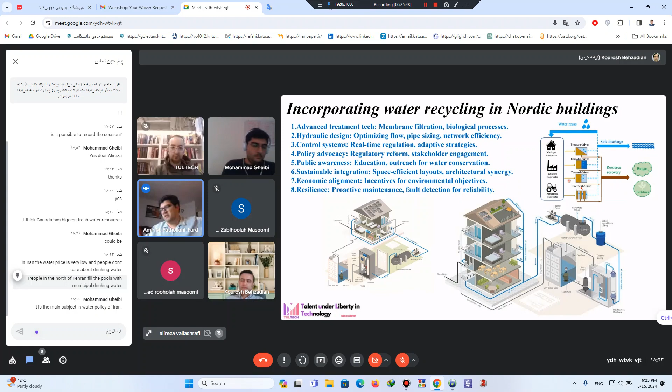I think we can look at Saudi Arabia or some developing countries in the Middle East that created new technologies for water recycling, and how they want to create artificial lakes, artificial rivers, artificial lands that change the weather and climate for the regions. It's very nice. I totally agree. Okay, let me just carry on and finish my presentation.

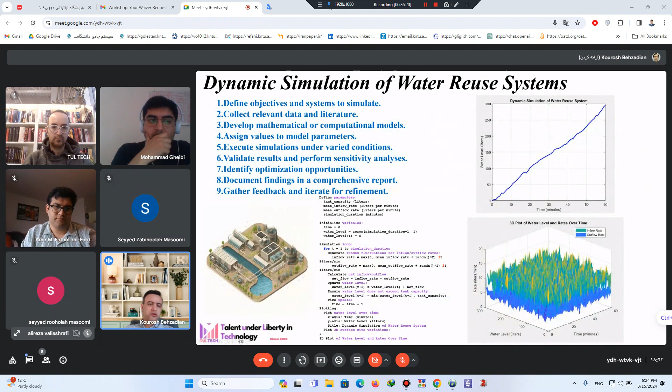I wanted to highlight the importance of water recycling. We have a dynamic simulation of water reuse systems, with some steps we need to follow, using MATLAB for example. So I'm going to try to pass quickly.

We can also optimize water recycling strategies. There are some steps we have to follow: vectorization, pre-allocation, model refining, dynamic adjustment, and parallelization using GPU to speed up the optimization process. Dr. Amir is the expert in these optimization techniques.

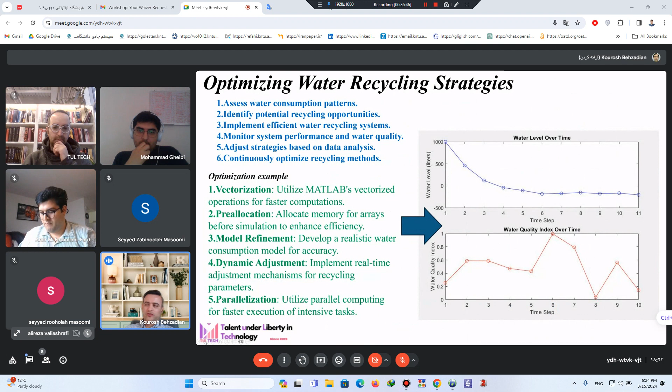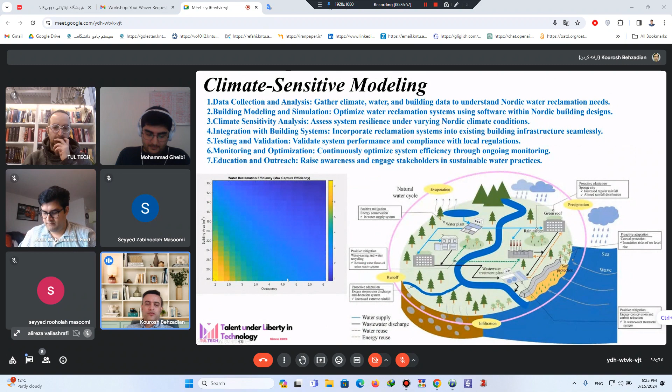Another area is climate sensitive modeling, where we can include the sensitivity of climate variabilities to do sensitivity analysis and analyze the system under uncertainty.

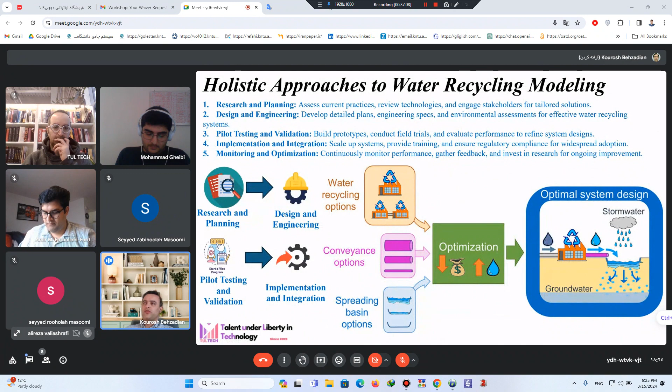Another point is the holistic approach for water recycling. We have to look at the comprehensive approach and include all the components and elements together. That's the nice figures that we have.

For predictive modeling, we can use either deterministic or probabilistic models to look at water demand predictions. So that's another aspect.

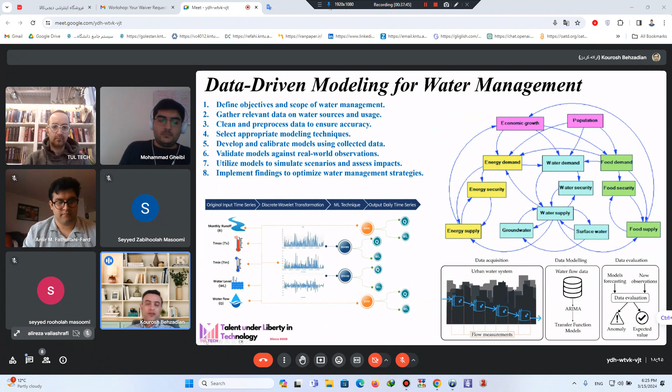Also data-driven models - if you have sensor-based data, we can collect data using a typical SCADA system and develop data-driven, AI-based models for predicting the system and analyzing and operating in real-time performance.

Another aspect is life cycle assessment, or LCA. This is very typical - we have to include any kind of emissions, like H2S or CH4, specifically from wastewater treatment, and analyze them through the life cycle assessment, considering everything from construction, operation, and demolition together.

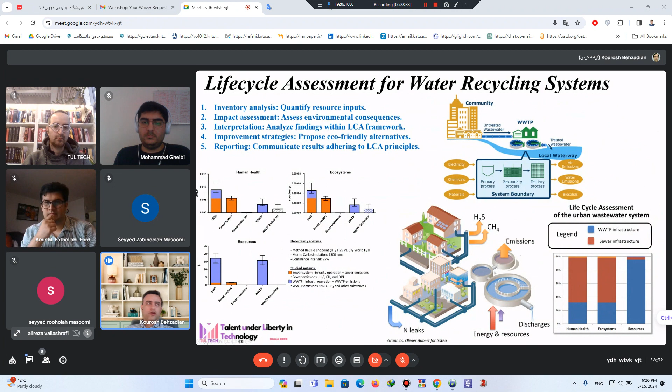In this way, we can consider different components of the system and see which one leads more to carbon footprint, energy footprint, or water footprint, and then make a decision on different options, which one is better.

Finally, we can also look at integrating IoT and AI. Nowadays it might be good to seriously look at how we can integrate things with Python-based programming, ChatGPT, or GitHub Copilot, which is also connected to develop some sort of AI-based and IoT systems.

Specifically nowadays, we have lots of sensors collecting real-time online data, or we can easily set up and install some sort of AI-based system. I think this is the most important area that we should focus on.

If we want to focus on any real project between countries like Europe, UK, and North America, we have to invest a lot in research articles and everything. We have to focus on IoT, how we can set up IoT technologies. I think this is an area where we are really lacking.

Normally, the approach we found is that we have to use off-the-shelf technologies. We are not at the stage to develop sensors ourselves, so we have to see what sensors are available in the market - humidity, water level, whatever sensors that are off the shelf and quite cheap - and try to connect them in some sort of compartment or package box we can design to assemble such an IoT system.

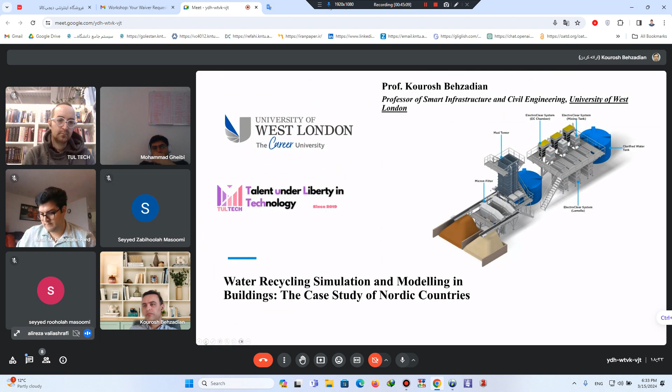Yes, go ahead, Alireza. Yes. I don't think so. I don't think that. Yeah, yeah,

Are you familiar with LC mass, Alireza?

I think that's the only way, as far as I know, for detecting these kinds of particle contaminations. But the point was that...

When we have the contaminations, let's say a source of contamination from industrial sources, I think the main concern we're just going to focus on is residential. In the UK, and more or less in Canada as well, Amir knows better, we might have a combined sewer. In the UK, combined sewers are very popular. A combined sewer is where sanitary sewage and surface runoff are collected in the same pipe.

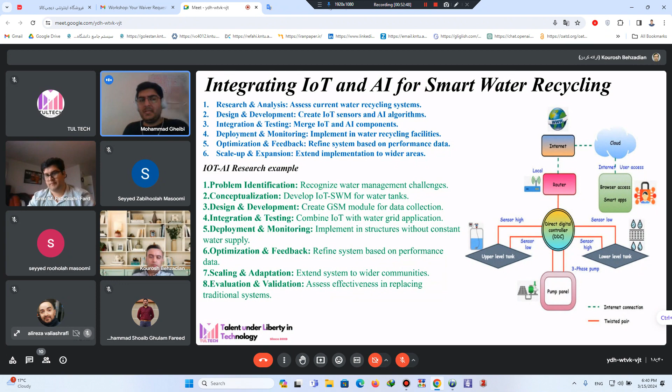Yeah, I truly agree with you. Real-time optimization is a very novel concept that can be used for optimizing and analyzing water supply and wastewater collection systems. I think this is an area of research that can be explored more with advanced use of machine learning and optimization algorithms that can help us heuristically optimize the data in time for analyzing solutions based on the conditions and complexities we encounter in our water supply and wastewater collection systems, right?

Yes, specifically for real-time error detection, we need predictive models like AI-based ones, which are quite fast. If you want to do optimization, it has to be done quickly too, in a short time. But the predictive model is really important to do it quick and efficient, with a good level of accuracy, because prediction with low accuracy is absolutely nothing. So we have to have a good estimate, otherwise no one can rely on and trust that data.

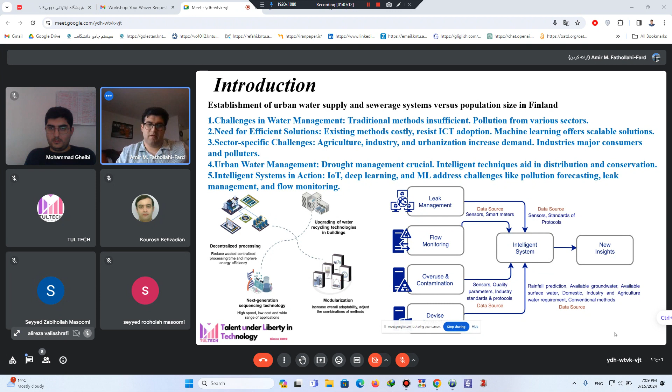Using AI, we want to address the challenges and provide insights for water management and water network solutions. To manage the systems, we need to consider the water supply and wastewater collection.

It is important how we supply the water from the surface and how we collect it, to recycle, to improve, to develop, and to use energy using the wastewater collection.

Developing such networks for integrating water supply and wastewater collection has different complexities, difficulties, and risks that we need to consider: many sustainability issues, ecological patterns, and considering a full solution for flexibility, resiliency, and sustainability for water supply and wastewater management.

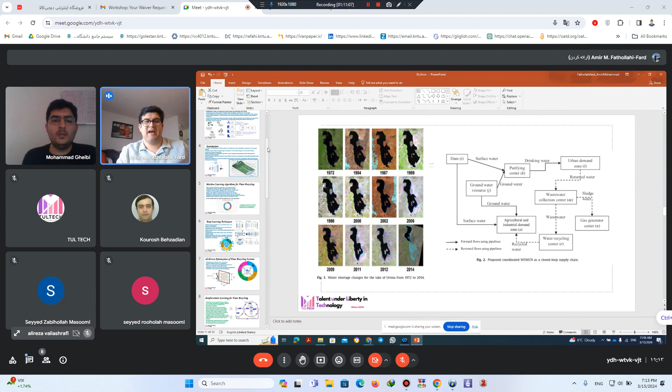Sure. In the following, I have a plan to define the water supply chain as a closed loop supply chain, how we can provide a network to integrate these issues. We'll talk about the closed loop supply chain, and then after that we have an optimization problem where we can focus on how we can use metaheuristic or heuristic algorithms for optimizing.

Such methods can be customized to any optimization problem, but for this type of problem, such as water networks, from the baseline of network design, water networks have more constraints than typical network design, because we need to consider logistical issues and also the pipeline. I will talk about them in more detail.

But I want to highlight that machine learning is nowadays very popular for analyzing water recycling. We need to define the flowchart of steps that we want to use for water recycling, for analyzing the parameters, how we want to predict the demand, and how we want to train our historical data.

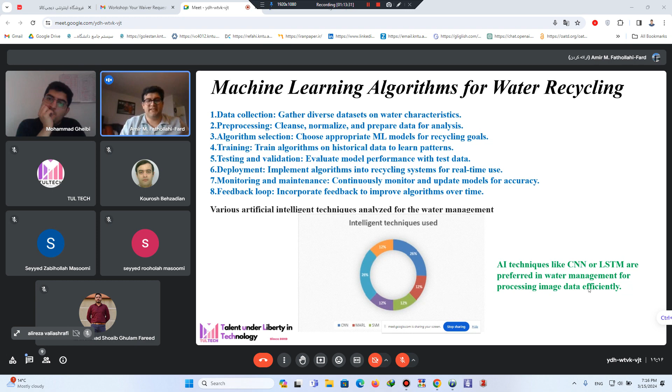Therefore, having many options for machine learning, we can consider different neural networks or the long short-term memory algorithm methods that can be used to improve the accuracy for water prediction demands and improve analyzing water management systems. So, machine learning is one idea. Another one would be contributing to the deep learning method.

Generally in deep learning, we should consider many layers to improve and train our data. When we increase the layers, for example using the multilayer perceptron, at each iteration of our algorithm we can improve the accuracy to detect errors or detect data that can be important for monitoring water systems, for analyzing details for a multi-factor, multi-agent, multi-level water supply and wastewater collection system. Similar to machine learning, in deep learning we also need to consider different layers for analyzing and managing our water supply and wastewater collection systems.

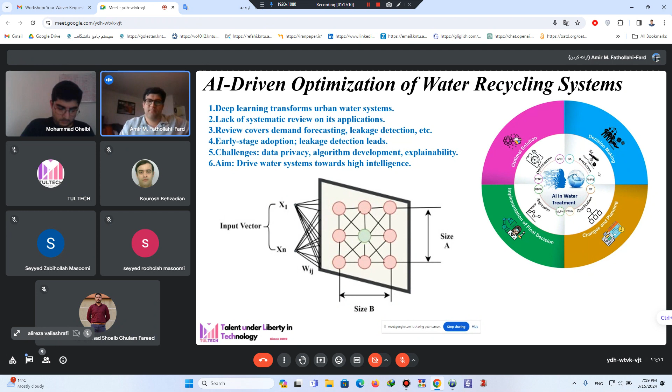As you can see, for the action of how we can get an optimal solution, we need to analyze the problems and provide a cycle of how we can integrate the trained data as input parameters, and then apply an optimization algorithm like genetic algorithm to find a solution for our water network, to design the pattern for our water network.

Similarly, another popular technique that is very important and commonly used in our research articles is reinforcement learning. This is a very advanced machine learning method that can help us learn the optimal actions and reduce the errors in our system.

Another important suggestion for interested readers is that we can use reinforcement learning to improve and design the optimal actions for our water recycling system. For example, as you can see, this is from one of the papers showing how we provide a loop and a connection between the variables, and based on reinforcement learning, connect and consider the details for our water recycling system.

Using reinforcement learning algorithms, we can drive real-time decision-making for water supply and wastewater collection. Based on the real-time data, we can use reinforcement learning for optimizing and making optimal decisions for the water supply and wastewater collection network.

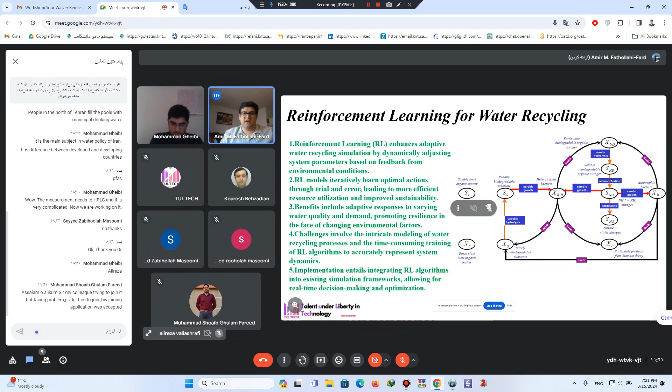Generally, a decision support system integrates all the machine learning and all the details from operations research in an integrated manner, to define a full solution for analyzing the water supply and wastewater treatment plants, with solutions considered using multi-criteria decision-making methods.

For example, there are many multi-criteria methods like TOPSIS, like DEMATEL, or many other decision-making methods that can help us sort the criteria, analyze their weights, and consider different sustainability issues, ecological factors, or other scientific items that can be integrated into our decision support system.

Therefore, these are the methods that can be used for water recycling and water analyzing systems. In the final steps, I want to provide a research article on how we can model the water...

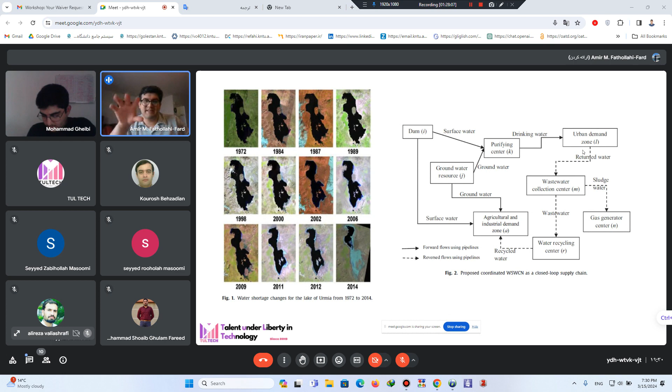For example, we consider that there is no connection between the same facility. It means there is no network between the purifying centers in our network, or we need to consider that there is no link between wastewater collection centers, and each wastewater collection center would act separately in our water supply network.

Another assumption relates to parameters that are uncertain. In this regard, to estimate the parameters, we must use machine learning or other learning methods for prediction, to define the demands for the agricultural and industrial sections and for our home users, considering scenario-based analysis. In this paper we consider probabilistic scenarios for estimating and improving the accuracy of our input parameters used in the optimization problem.

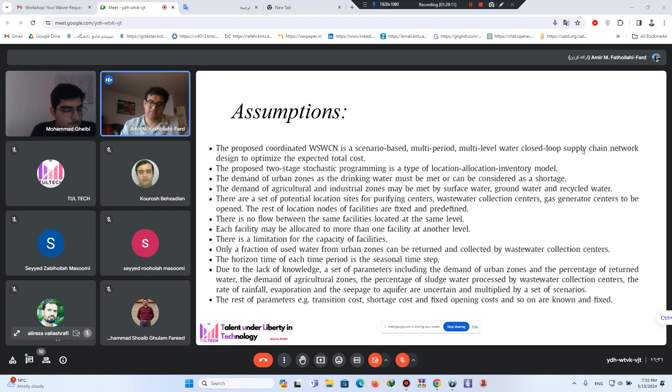Dr. Amir, was that one objective function in your model? This is a single objective. Yes, it's a simplified single objective that only focuses on economic issues, and the rest of the other issues are considered as constraints. Therefore, this single objective computes the costs for all facilities and for transitions based on the network we define for the water supply and wastewater collection.

Based on this issue, we need to consider the inventory constraints that we have, including evaporation on the surface water. There are many factors that can impact the inventory status of water at each facility, based on climate issues, evaporation, and rain predictions, such as how many rainy days we have and how much water can be added to our systems at each period.

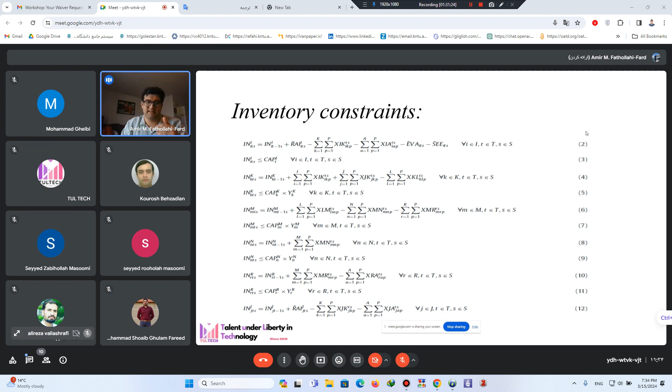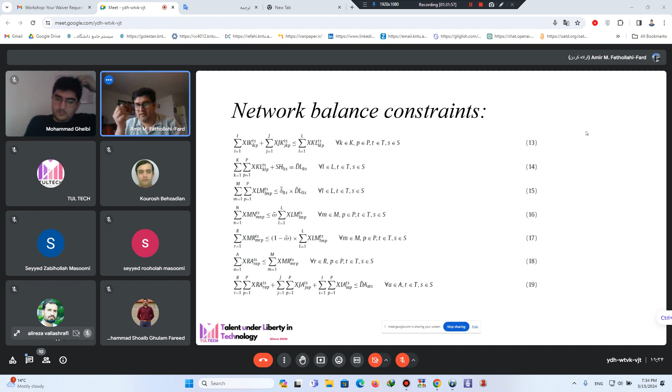Here we have the inventory constraints, and as a network with multiple facilities, we need to connect them. We need a network balance constraint that shows there is a balance between the inputs and outputs at each node in this facility. These are the network balance constraints that must exist in any water supply and wastewater collection network.

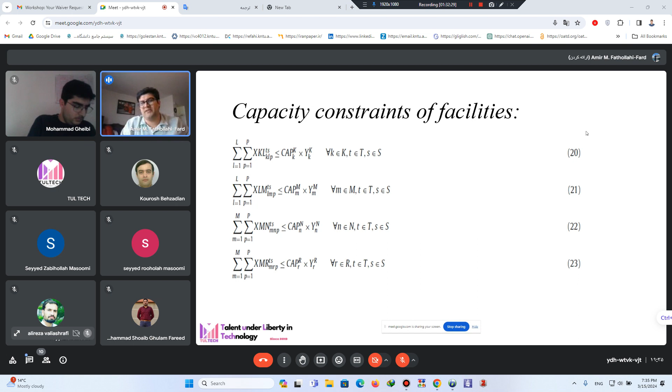We will have capacity constraints that show at each facility there is a limitation for the water capacity that can be operated—at each water treatment center, at the purifying center, at the wastewater collection center. There is a limitation for the water operated at each facility.

In a water supply and wastewater collection network, we need to define different pipelines and canals that can be used to connect the facilities to each other. These pipelines also have capacity limitations. We need to consider the capacity that is suitable for the connections for the pipelines in our network.

We also have location constraints, meaning we cannot locate the purifying center in any location we want, based on the limited potential locations previously identified from historical data. We need to select one of them, or a few of them, based on the limited budget we have for our network to make the location decisions for our centers.

And finally, decision variables, which can be binary and non-binary variables in our optimization model.

As an optimization model, we considered a case study based on the West Azerbaijan province in Iran, and the source of the dams that exist there. Based on the data we predicted, we solved our model and considered the cost function based on realistic, optimistic, and pessimistic scenarios.

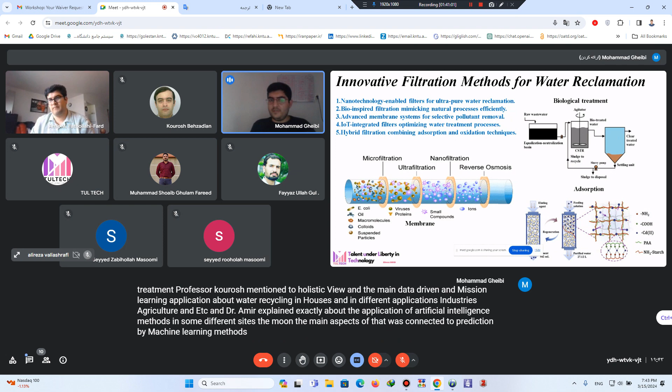And Dr. Amir explained exactly about the application of artificial intelligence methods in some different sites. The main aspects were connected to prediction by machine learning methods, different machine learning with focus on deep learning, and another one was optimization in the loops and supply chains by meta-heuristic algorithm, which I know is his main expertise.

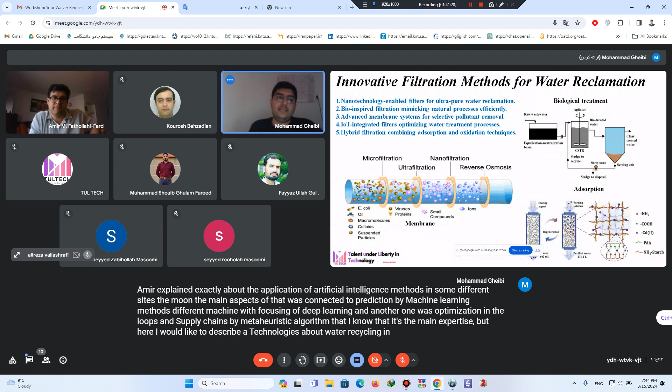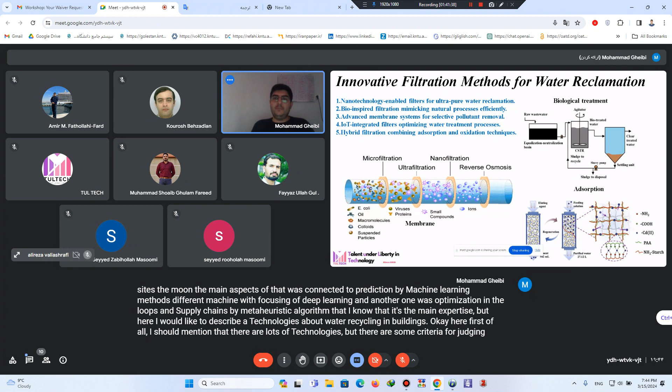But here I would like to describe some technologies about water recycling in buildings. First of all, I should mention that there are lots of technologies, but there are some criteria for judging them. As an environmental engineer, when we want to select one of them, we should consider criteria such as investment costs, material costs, and chemical costs during the operation.

The civil engineers and designers mentioned that 60% of the share in decision making about technologies is related to operation duration, because during the operation process we should spend lots of money continuously, and based on this fact we should consider the current cost.

Maybe, for example, I'll mention this - in this picture you can see there are some different methods. One popular method is the application of membranes. There are different types of membranes based on the pore size - for example, microfiltration, ultrafiltration, nanofiltration, and reverse osmosis, known as RO - because each of them has a specific application.

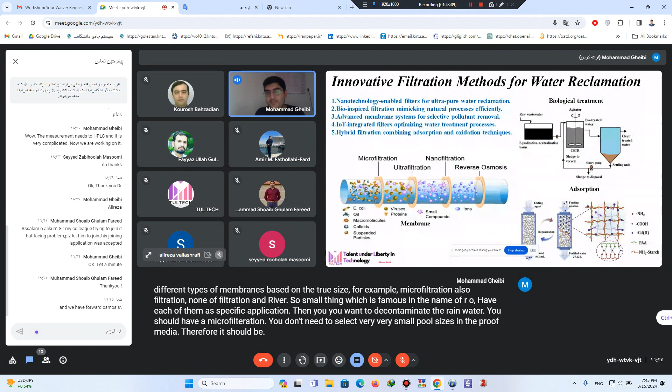When you want to decontaminate rainwater, you should use microfiltration - you don't need to select very small pore sizes in the porous media. Therefore it should be cheaper than other technologies, which you can see here in this picture, the left one. Based on the specific application, we should find the appropriate condition for this membrane technology.

In membrane technologies, the main problem is related to fouling, because after decontaminating by trapping the pollutants in the pore sizes, we will have fouling in the media. We should have backwash, and in the backwash process, on the reverse side of the membrane, we will release chemicals into nature. This is a disadvantage of the method, but its performance is much higher than other methods, and operation is very easy - but in simple terms, it is not a very green method for decontamination.

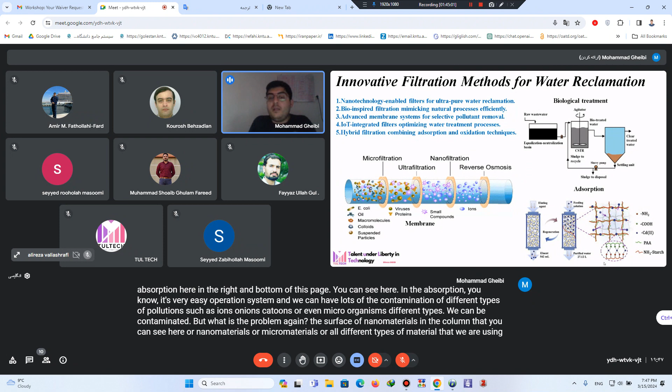Another one is adsorption. Here in the right bottom of this page, you can see that adsorption has a very easy operation system. We can achieve lots of decontamination of different types of pollutants, such as ions, anions, cations, or even microorganisms - different types, we can decontaminate them. But what's the problem? The surface of the nanomaterials in the column, or micromaterials, or all the different types of materials we use in the columns, become saturated after some time.

But it is another technology we can use. The best one from the environmental aspect, the most green technology, is biological treatment, because microorganisms, like in nature, help us decompose the structure of pollutants and create simple compounds in the effluent. But what is the problem? It is the microorganism.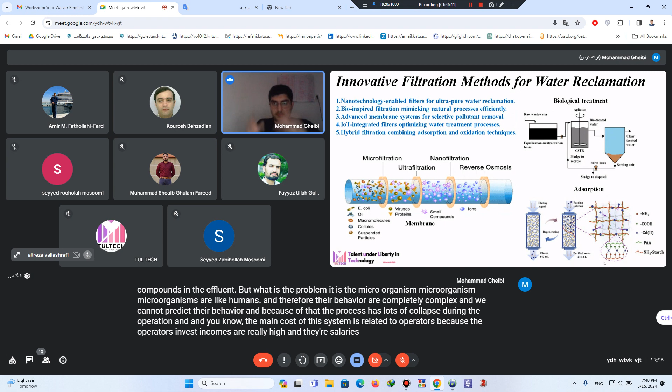Microorganisms are like humans, and therefore their behavior is completely complex, and we cannot predict it. Because of that, the process has lots of collapse during the operation. And the main cost of this system is related to operators, because their salaries are very high, since they should be very expert people.

But I said all of this because I wanted to say that in each method we have some advantages and disadvantages. Why am I telling you these notes about these technologies? Because with the application of simulation, we can reduce the cost of operation and design, both of them.

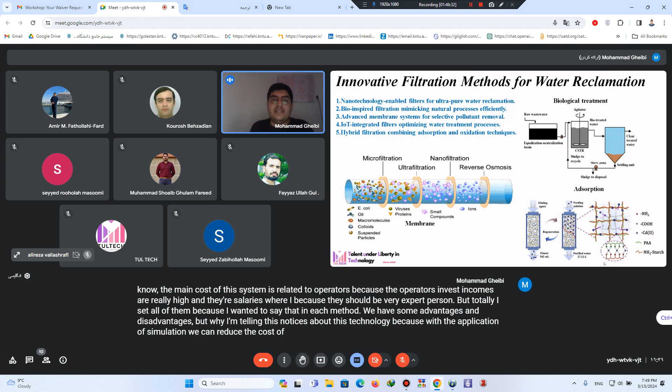In the following, very fast, I'm going to go through some applications and examples about these methods. One approach you should check after our meeting is in Scopus and Web of Science data centers, where you can find lots of papers about membrane applications. I think every minute some papers are published in the field of membrane application for environmental pollution - air, soil, water, and so on.

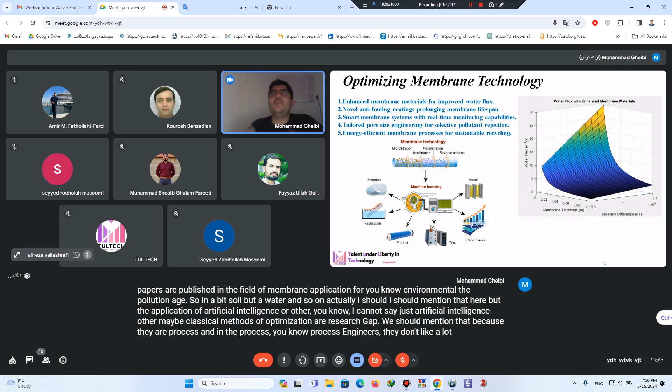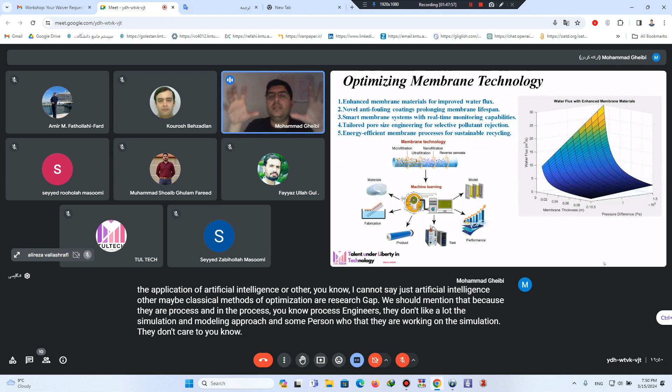I should mention that the application of artificial intelligence, or other classical methods of optimization, is a research gap. This is because process engineers don't like the simulation and modeling approach much, and people working on simulation don't care much about the aspects of experiments.

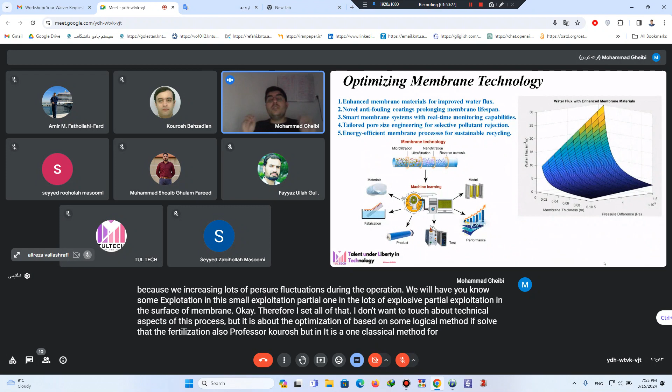Okay, therefore I said all of that. I don't want to talk about the technical aspects of this process, but about optimization based on some logical method, FSolve. Dr. Fathollahi-Fard is an expert in this, also Professor Kourosh, but it is one classical method for optimizing multi-objective functions in the same process.

Another aspect I want to talk about is the biological process. As I mentioned before, biological process complexity is connected to the behavior of microorganisms. Because of this fact, we should consider different criteria when we want to optimize this system.

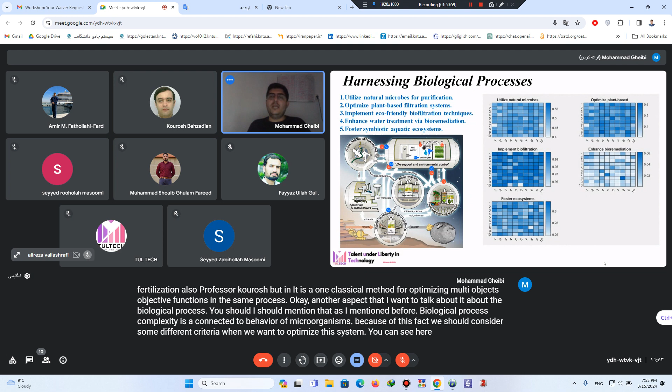You can see here we use some heat maps. Why heat maps? Because with the application of heat maps, we can compare different cells which are linked to various aspects of the process. If you have a specific microorganism for decontamination of chemical oxygen demand, as an index of organic material in wastewater...

When your pH is decreasing, they are not working. When it is increasing, they are not working. When temperature is increasing and decreasing, they are not working. They are very, very sensitive phenomena and live ecosystems in the environment.

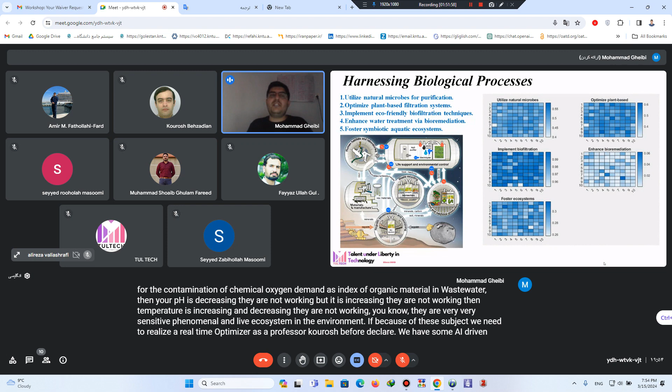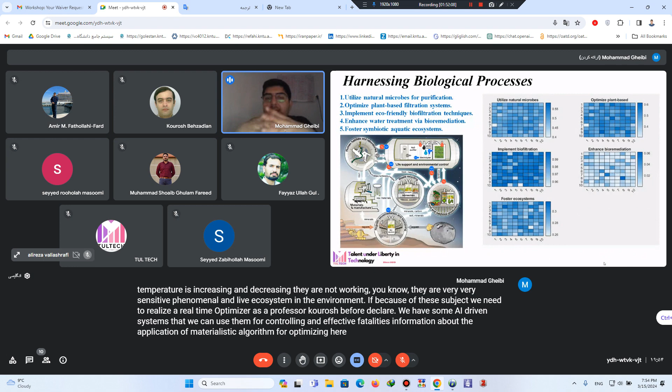Because of this subject, we need a real-time optimizer. As Professor Kourosh declared before, we have some AI-driven systems that we can use for controlling. And Dr. Fathollahi-Fard mentioned the application of meta-heuristic algorithms for optimizing. Here, we need to optimize and implement a data-driven, real-time system because we have lots of sensors in the reactors.

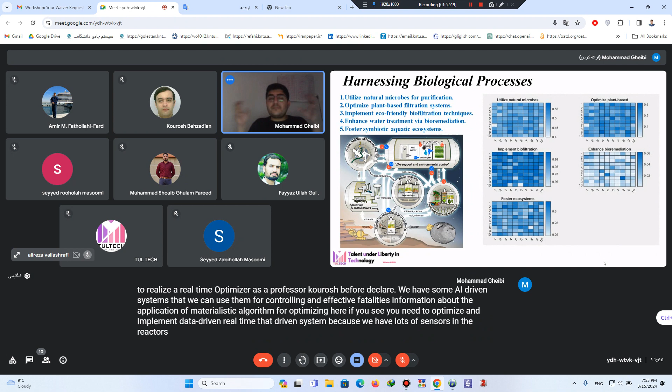For example, in activated sludge reactor or more complex systems such as SBR, sequencing batch reactor, or other reactors, we have lots of sensors for detecting pH, alkalinity, temperature, and other parameters. We should make decisions real time as operator in each reactor for finding the possible problem.

Here in the left and above, you can see one optimization about some features. The feature here was connected to the performance of the system about decreasing chemical oxygen demand and biological oxygen demand in the reactor. But biological oxygen demand, we cannot compare or compute it real time, and sensing it real time based on one ratio by chemical oxygen demand we are detecting.

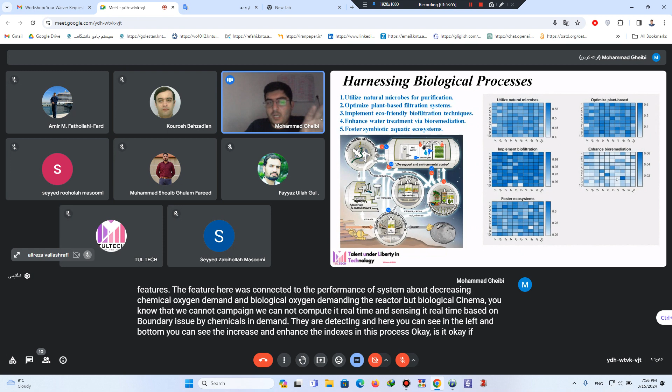And here you can see in the left and bottom, we increase and enhance some indexes in this process. Okay, is it okay if you have any question? Just ask me about these two slides.

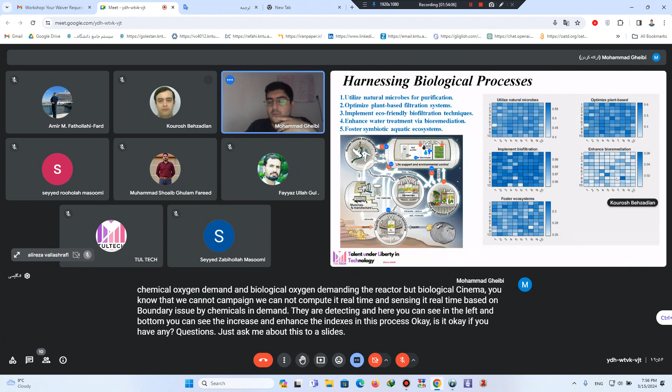Okay. About the next step, I should mention some applications about combination of different methods. What is the main problem in this situation of wastewater treatment plants and water treatment plants?

You can imagine that in the water treatment plant or wastewater treatment plant, we cannot purify the water resources just with one system. At least we need 6, 7, 8 or more systems because we have primary treatment, secondary treatment, and advanced treatment.

Each treatment system has influence on the other ones. And because of this issue that I mentioned, we should connect all of them as one complete and comprehensive system also for this problem. Why am I telling this fact?

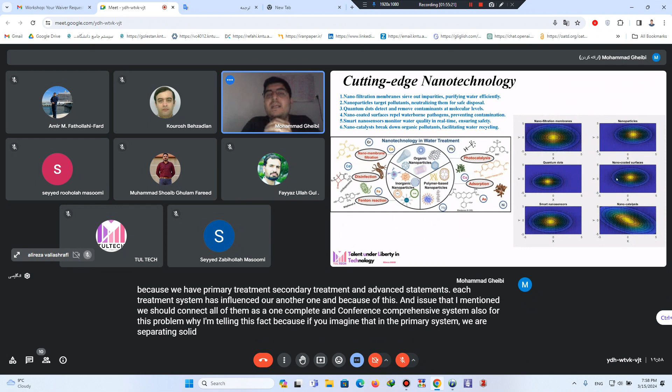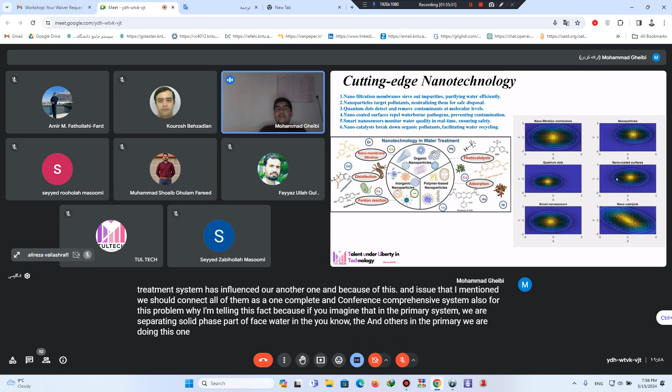Because if you imagine that in the primary system, we are separating the solid phase part of wastewater, and others in the primary, we are doing this. In the secondary process, we are decontaminating the organic matter, just organic materials.

And in the last one, as advanced, for example, one advanced method, we are decontaminating the microorganisms. But solid phase, and also organic one, and also just organic from solid and dissolved one, and also microorganism - all of them have different behavior, and connecting all of them in one dashboard needs a high potential computation system.

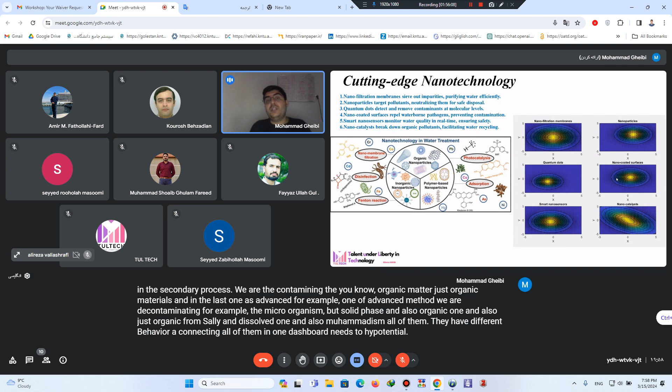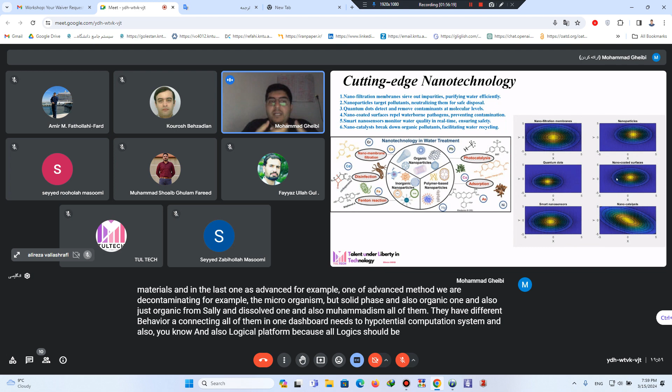And also a logical platform, because all logics should be considered in different ways for meeting the contamination criteria. If you have any comments or questions during my presentation, just come and say something. If you want, we can negotiate together about these subjects.

Another application that both previous presenters mentioned is about connection of IoT and AI system. Why are we talking about the connection of both? Because with the IoT system, we can create the infrastructure for receiving, transferring, and initial processing. And with the application of artificial intelligence, we can execute appropriate logics in this parameter.

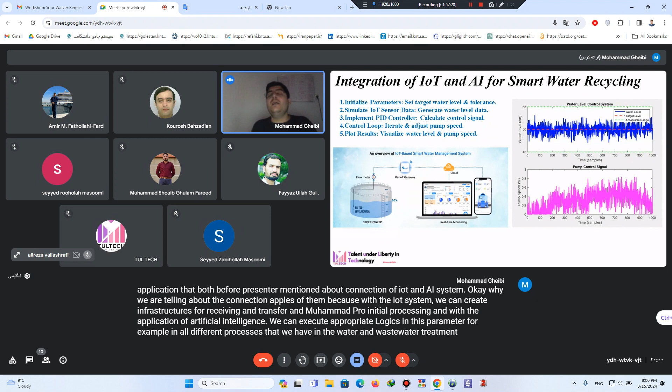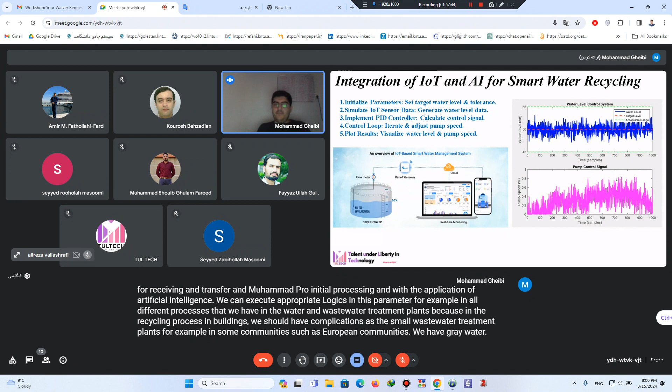For example, in all different processes that we have in water and wastewater treatment plants, in the recycling process in buildings, we should have packages as small wastewater treatment plants. For example, in some communities, such as European communities, we have gray water separately. We are gathering them in comparison to brown water. We are saying green water, gray water, and brown water.

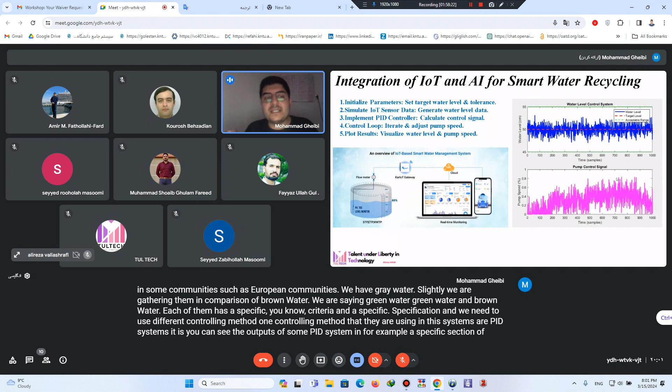Each of them has a specific criteria and specification, and we need to use different controlling methods. One controlling method they are using in these systems is PID systems. You can see the outputs of some PID system in, for example, a specific section of this infrastructure - for example, pump control system, because we should have some alarm management during this process.

Together with each of you, I will share these outcomes also with you guys, and we can have some email connection together. Each person is motivated by a specific target for ISI publication. We can negotiate together, and we can complete these research items because they meet at least the standards of ISI and TUL Tech.

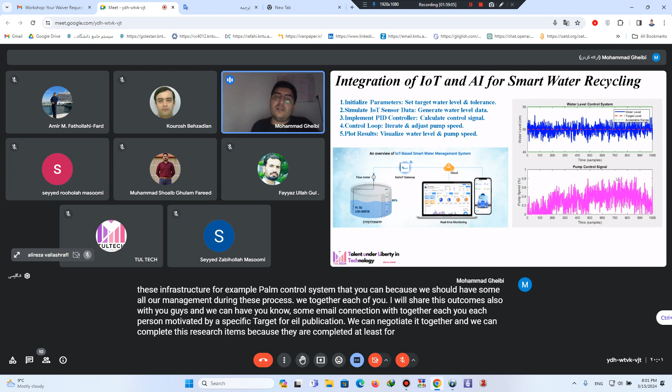Another issue I want to talk about is related to a popular subject about electrochemical techniques application for wastewater purification and controlling the system. But here the main topic - some people are working in their research on water quantity management, yes, water resource management. And when we are talking about the quality of water, the complexity of each aspect of water management will increase dramatically, because it's very important based on the type of contamination.

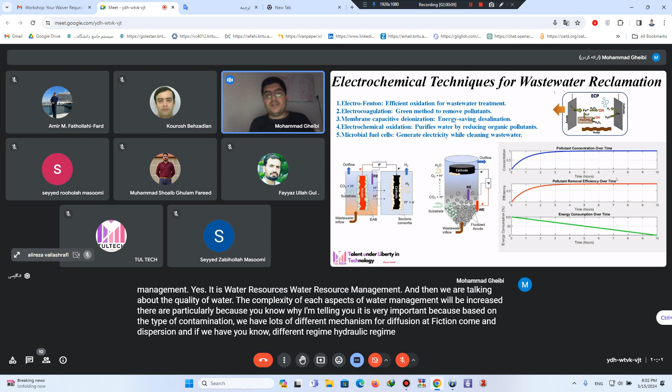We have lots of different mechanisms for diffusion, advection, dispersion, and if we have different hydraulic regimes in the water, we will have different behavior. What is the connection between fate and transport of pollutants in different hydraulic regimes? Based on this, in electrochemical systems we have all the parameters mentioned before. We have two electrodes in the system, a cathodic one and an anodic one, and we have one electric field between them, so complexity increases in this system. By applying machine learning and meta-heuristic algorithms, we can increase the quality of control in this system.

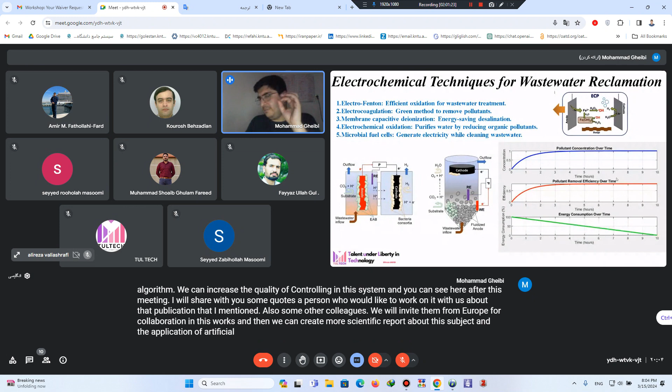After this meeting, I will share with you some codes, for anyone who would like to work on it with us, related to the publication I mentioned. We will also invite some colleagues from Europe for collaboration on this work, and then we can create a scientific report about this subject and the application of artificial intelligence and simulation approaches for controlling the performance of this system.

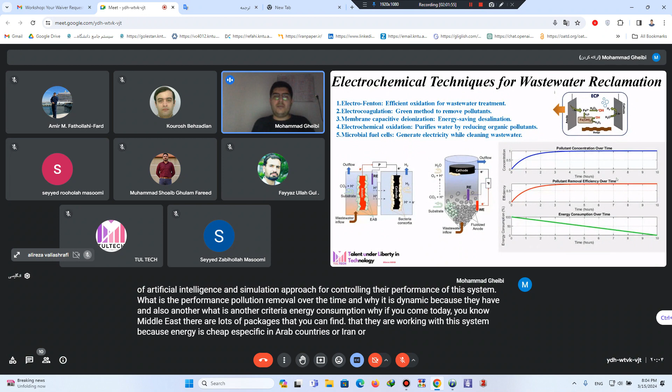What is the performance? Pollution removal over time, and it is dynamic. Another criteria is energy consumption. If you come to the Middle East, there are lots of packages using this system because energy is cheap there, specifically in Arab countries, Iran, or Saudi Arabia. But if you come to Europe, Canada, USA, or other Western countries, you find electrochemical systems for different applications integrated with renewable energy, just renewable energy.

Without renewable energy, you cannot find them because it's not beneficial for installers. Another aspect I wanted to mention is the multi-objective nature of both energy consumption and removal of pollution—it is another multifunctional parameter. Thank you for your consideration. If you have any questions, I'm here to answer them.

Excuse me, sir. Okay. Sir, would you please go to the previous slide? This last one? Yes. Okay, you have shown some graphs on the right side.

So what does it mean by the concentration? Is it increasing with respect to time? Yeah, so the pollutant concentration over time increases. Can you please explain it? Here, the concentration is the concentration of byproducts, not the initial concentration. Initial concentration is decreasing, yes.

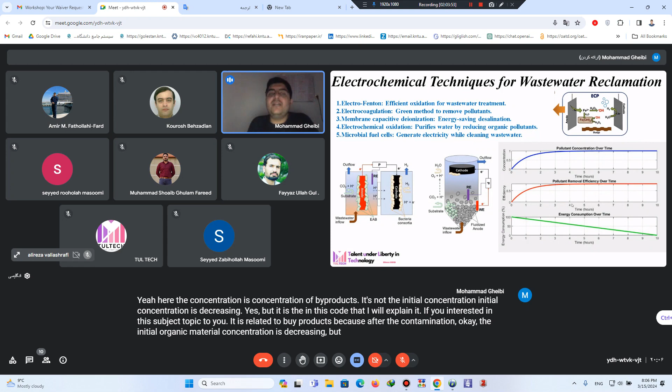It is related to byproducts because after the decontamination, the initial organic material concentration is decreasing, but what is increasing? The byproducts. Why are we simulating the byproduct concentration?

Because of the toxicity. After contamination, for example with different groups of PFAS, like PFOA or GenX, the most important issue after contamination is connected to the toxicity of byproducts. PFAS is a toxic material and is carcinogenic, but there are some shorter chain PFAS compounds that are more carcinogenic. Because of that, we should simulate their behavior during the simulation to find what the initial toxic material is, and it should be decreased.

And what about the cost effectiveness of these different techniques for treating the water? About the cost of what? Cost of treatment. Yeah, it's very important.

But here, we should decrease some parameters. It should be added, yes, it should be added here because it's related to the topic of research. When you want to focus on energy, on performance, yes, but about cost it's very important, specifically in this method. But you should notice that in electrochemical systems in European countries, in Western countries, what is the main aspect of cost?

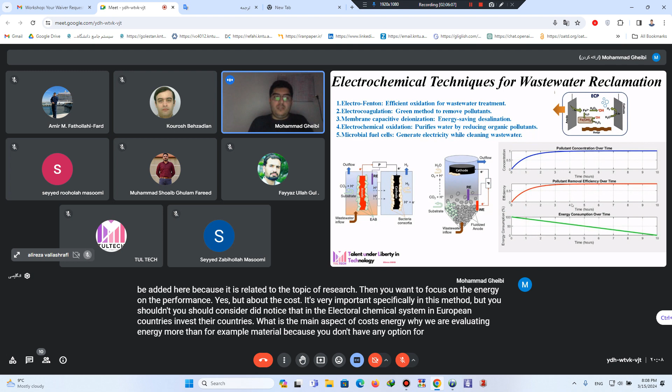Energy. Why are we evaluating energy more than, for example, material? Because you don't have any option for changing the material. What is the material here? It is the electrolyte. We should add electrolyte for transferring electrons between anode and cathode. Do you agree with me? Yes. Okay, during the process, we cannot change it because of operation.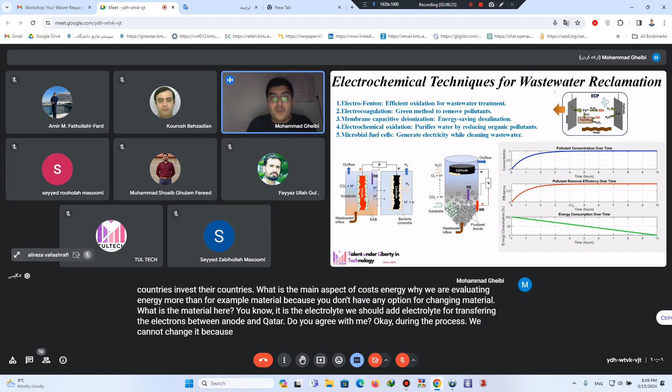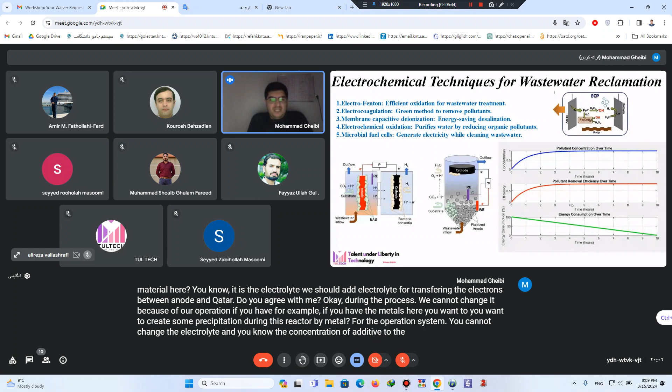If you have, for example, metals here, you want to create some precipitation during this reactor by metal. For the operation of the system, you cannot change the electrolyte and the concentration of additive to the reactor because it should be constant. Otherwise, in other scenarios, you will have decreasing pollution removal efficiency.

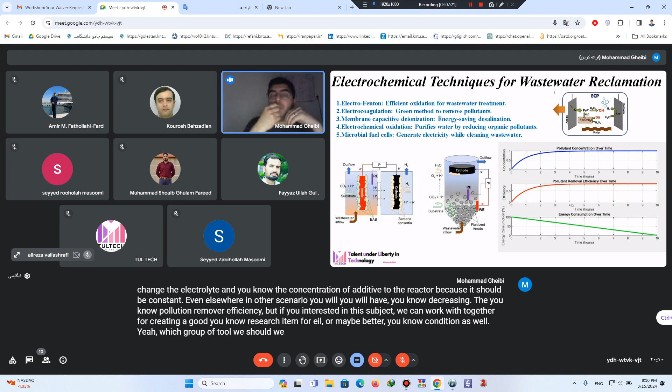If you're interested in this subject, we can work together for creating a good research item for TUL, or maybe a better condition, with a group of tools. We should consider some outputs, such as Dr. Fatholahi-Fard, Dr. Amir, if you remember, in his research item, they mentioned pessimistic, optimistic, and moderate scenarios. We should find some criteria and solutions for our problem that meet all different aspects.

How much do you want to decrease the cost? If you are decreasing the cost 100%, you will have decreasing in the efficiency. You should present some multifunctional solutions to the principals.

Maybe some principals in United Kingdom, they are finding one chromosome, for example, in genetic algorithm, they are selecting one chromosome. In the same problem in Qatar, maybe some other principals, they are selecting another chromosome based on the environment of the local condition, about the pollution, because energy costs, material costs in your country, Pakistan, the material cost is very, very lower than other countries. Why? Because you are producer of some chemical materials in your standard.

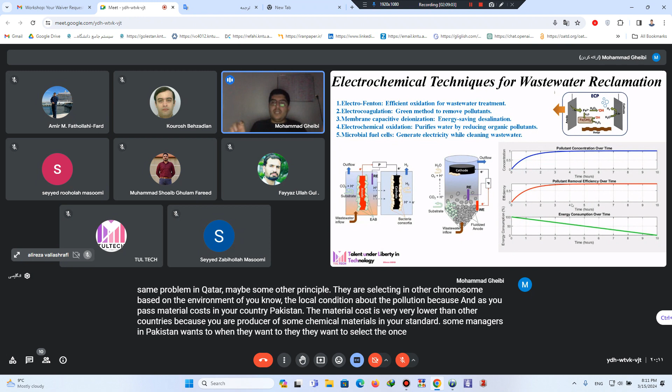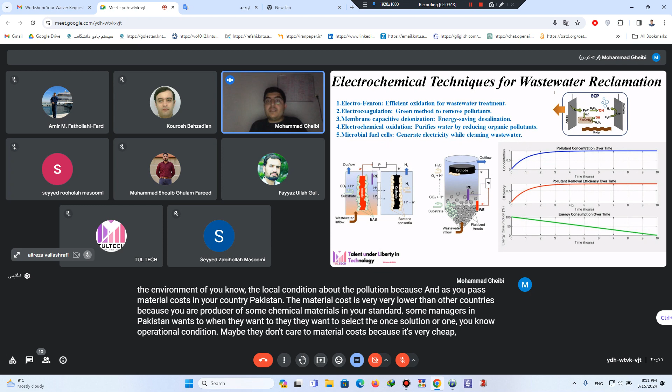Some managers in Pakistan, they want to select one solution or one operational condition. Maybe they don't care about material costs because it's very cheap. But if they want to make a decision in Canada, absolutely yes, they will consider the material costs.

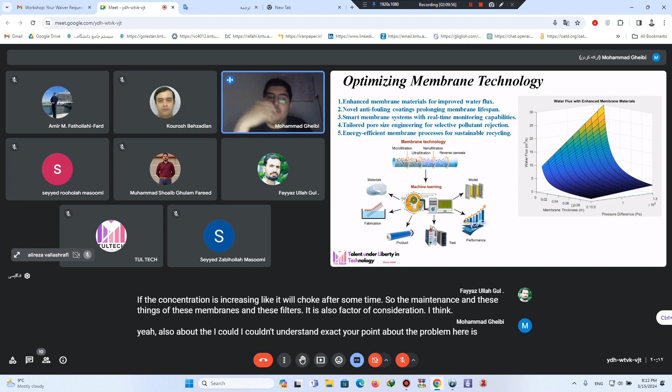I couldn't understand exactly your point about the problem here, is it about the cost? Yeah, about the cost and the maintenance of this. Exactly, because of that I mentioned the fouling process. What is the main part of maintenance here is fouling.

Because, for example, for saline water, if the fouling process is increasing, the rejection rate will be reached to around more than, I think, 50%. You know, it's a very tough condition. We should solve it. And if we cannot, yes, maintenance is a very nice target that we can consider, but we should break down the different aspects of maintenance.

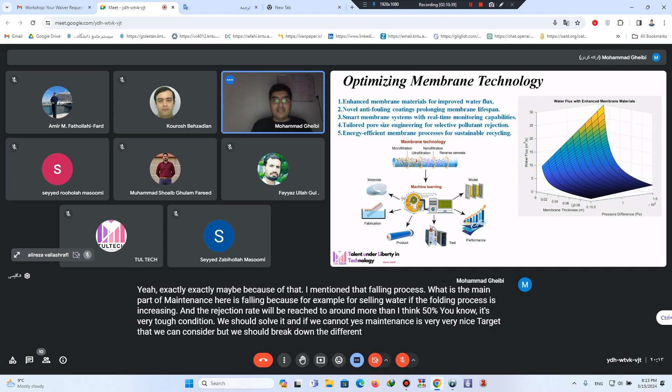How we can compute maintenance during the process as mathematical equations. If you evaluate the literature review, and maybe now you have experience, if you have experience, correct my notice here.

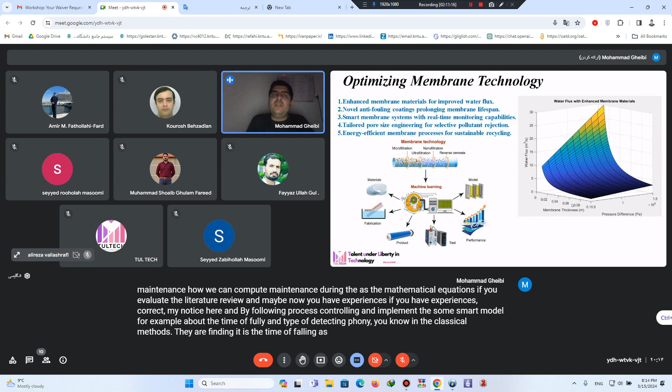By fouling process controlling and implementing some smart model, for example about the time of fouling and type of detecting fouling. In the classical methods, they are finding the time of fouling as we're changing between pressure - with changing the pressure in the membranes and each sheet, they can understand it is the time of backwash, and after sending one order to the PLC board, they are reversing the flow.

But here, by controlling the fouling, we can find a better understanding about maintenance. If you have any comment about showing the maintenance, inform me.

Yes sir, in these ultrafiltration units, we have the rapid sand filters or slow sand filters that can be done by backwashing. But as far as these membranes are concerned, like the reverse osmosis membrane, it should be completely replaced, and the cost of that membrane is very high. So for commercial uses, they use RO filters, but for domestic purposes, it is very difficult to use these RO filters and such things.

You're right, but I should mention that it is related to the type of pollution. For example, when you have saline water, you don't have any chance, just you should use RO, reverse osmosis. Other methods are very expensive.

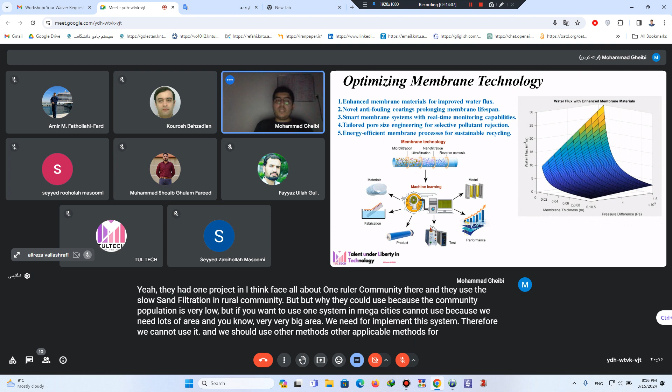Therefore, we cannot use it, and we should use other applicable methods for this system. If it is connected to the condition that you have—pollution, flow rate, type of pollution—we should use it.

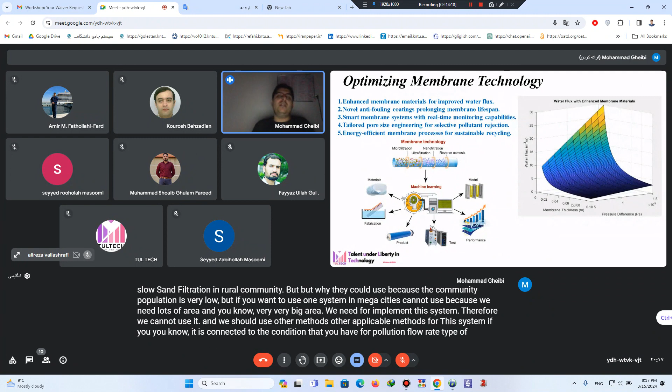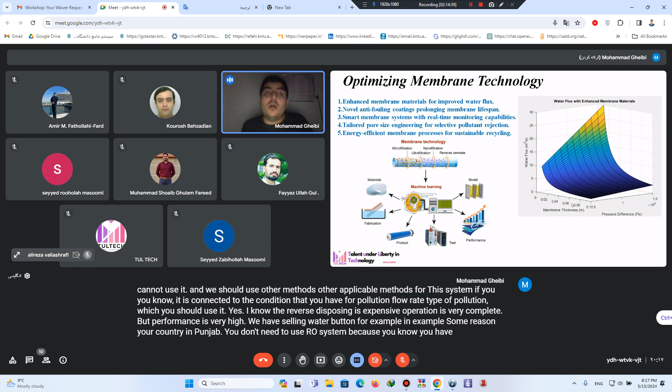Yes, I know the reverse osmosis is expensive and the operation is very complicated, but performance is very high. We have saline water, but for example in some regions of your country, in Punjab, you don't need to use an RO system because you have lots of high quality water. But in the border of Iran, in Sistan region, you should use RO because you have lots of saline water and nitrate water. Water is polluted by nitrate, so that's your only option.

Yes, sir, you are right. There, the TDS is very high. That's what we use, because of the TDS. You don't have any other chance—just nanofiltration or reverse osmosis, and you know that the flow rate of reverse osmosis is more than other methods.

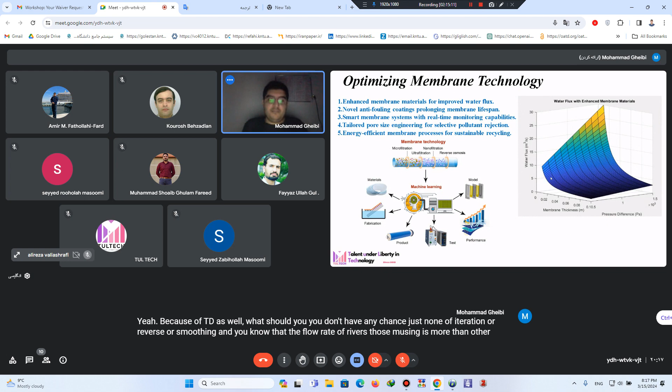Yes, and in our province, Khyber Pakhtunkhwa, we do have high saline water with TDS almost above 1500. So there are districts like Karak and D.I. Khan where we have this problem of salinity, so we use the RO filter there.